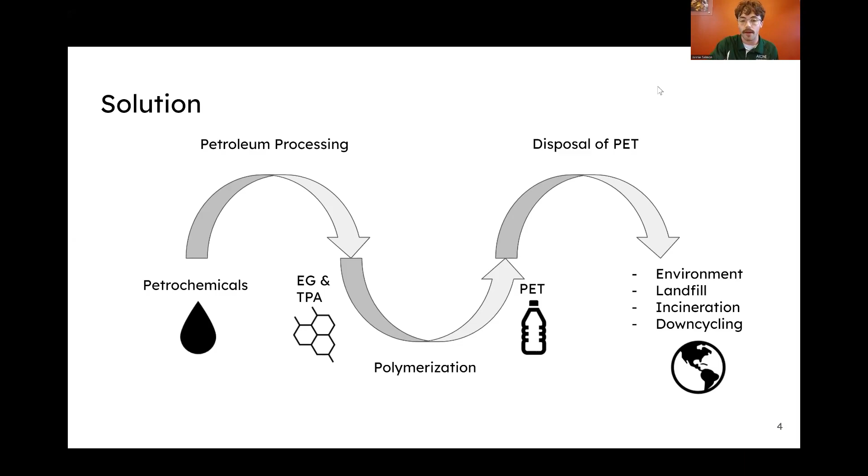When it's then polymerized into PET, where does that plastic go? Well, it goes into the environment, landfill, or it's incinerated or downcycled, all of which still have the plastic there. So what is going to happen to the PET? Well, that's where we come in, where we take a recycling method of closing the loop. This takes out the petroleum processing, so we don't need any more oil for this, and takes away the problem of taking that PET and putting it into the environment, where we're able to close the loop and use the same PET over and over again.

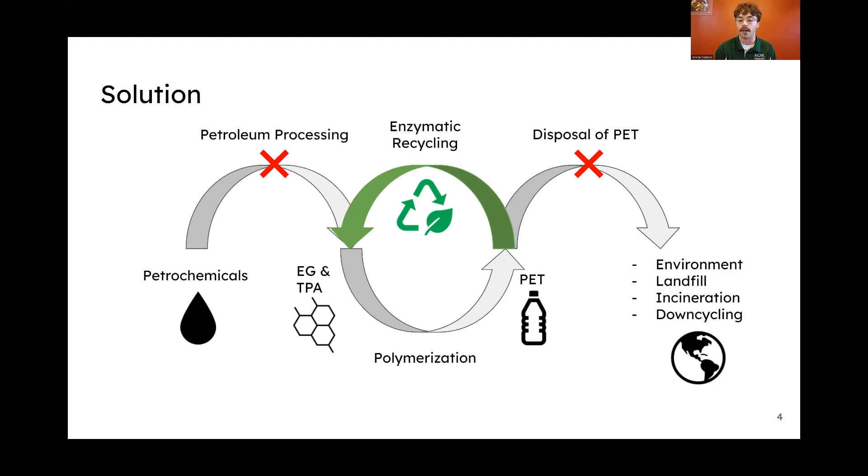Right now, this is also better than other recycling methods due to the fact that it's a cleaner cut on the monomers, where ethylene glycol and terephthalic acid are better in that regard. For the process synthesis and description, the team decided to split up these descriptions into the upstream and the downstream process. For the upstream, we decided to recycle 10 tons of PET plastic per month based on economics for the Larimer County area.

For the upstream process, we have to extrude the PET solid waste at 245 degrees Celsius with a twin screw extruder, and this is to make the plastic amorphous and easier for the enzymes to digest. Then that amorphized and extruded PET will go into a bioreactor containing the ICCG enzyme, which degrades the plastic with sodium hydroxide media. The parameters for this bioreactor will be a pH of 8, 72 degrees Celsius, and 4 milligrams of ICCG enzyme to 1 gram of PET. These parameters were determined by testing on campus and will be explained later.

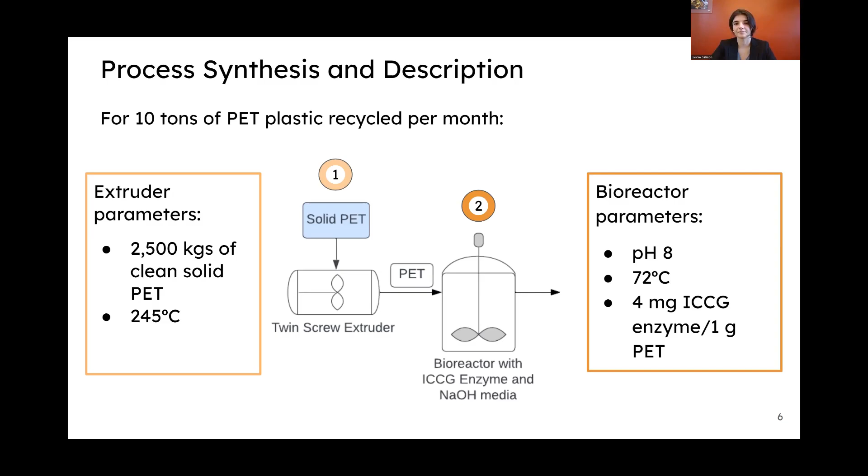So, moving on to the process synthesis for the downstream part of the system, we move on to point 3 here, which is an activated carbon column. This is going to be receiving the product stream from the bioreactor, and it's going to pick up impurities such as solid PET and their oligomers, enzymes from the broth, as well as any other organic impurities such as dyes that could have been in the bottles.

Then that's going to feed into point 4 here, which is a crystallization tank, and it's where the first separation of one of the monomers is going to take place, for TPA. The crystallization tank is going to be receiving sulfuric acid in order to lower its pH and have that terephthalic acid crash out of solution in crystal form and be easily separable from there. And that's where that process stream in the green is going.

And now the product stream is going to feed into the basic mixing tank, which is where we're going to return, in a caustic phase, the pH of the stream back to a neutral pH, around 7 to 8 depending on the process conditions, where we're going to be adding magnesium hydroxide as a base to counteract the previous addition of sulfuric acid. And then after that, we're going to go into a different phase where we have ammonium hydroxide added.

The problem is, when you add the magnesium hydroxide and the hydroxide groups break off and raise the pH again, what you're left with is the magnesium salt. So in order to regenerate that magnesium to repurpose for this process, which is one of the alternative separation methods we've looked into with the recycle stream on the mixer, we're going to add ammonium hydroxide, as seen in part 5 as well, where the hydroxide from the ammonium hydroxide will regenerate the magnesium hydroxide, which we can then put back into the process.

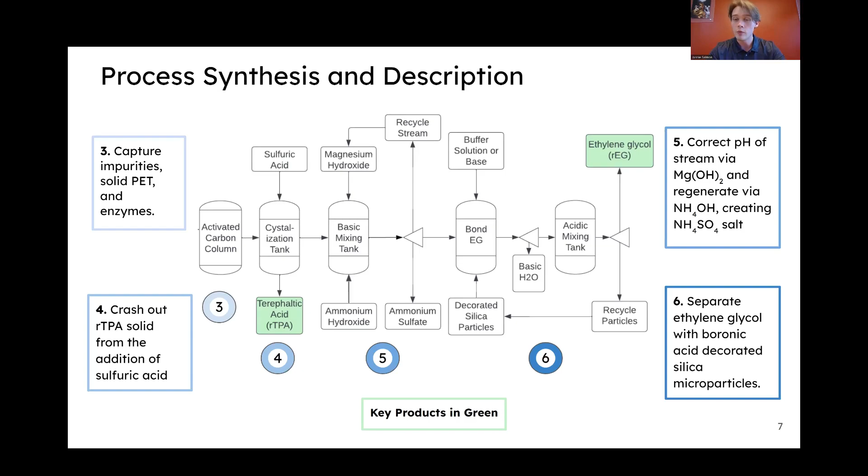Like I said earlier, we are going to describe our testing to develop our process synthesis diagram. For the upstream, we did testing to determine the optimal parameters to produce terephthalic acid, also known as TPA, and ethylene glycol, EG. These are the monomers that will help close the loop to recycle PET bottles. We did this by varying the enzyme concentration and the temperature of degrading the plastic. You can see this in the image here. We have 6 different variations of these parameters, and we ran these for about 24 hours to determine the maximum production of TPA over that experiment.

We determined the TPA production with HPLC, or high performance liquid chromatography, with the ARC lab and the chemistry department. From this testing, we determined that 72 degrees Celsius with 4 milligrams of ICCG enzyme to 1 gram of PET was the most optimal, based on it having the most terephthalic acid produced compared to the other parameters. You can see here in the image where we have little fine lines of PET plastic, and this was the most degraded plastic compared to others where we had more folded plastic.

As for the downstream testing that we did for the process synthesis, we looked at determining the validity of the alternative separation methods that we proposed for both monomers, TPA and ethylene glycol. For the first half with TPA, we attempted a calculation-based pH reduction from 8 to about 3 in order to have the solid TPA crash out of solution and be easily recoverable with filters.

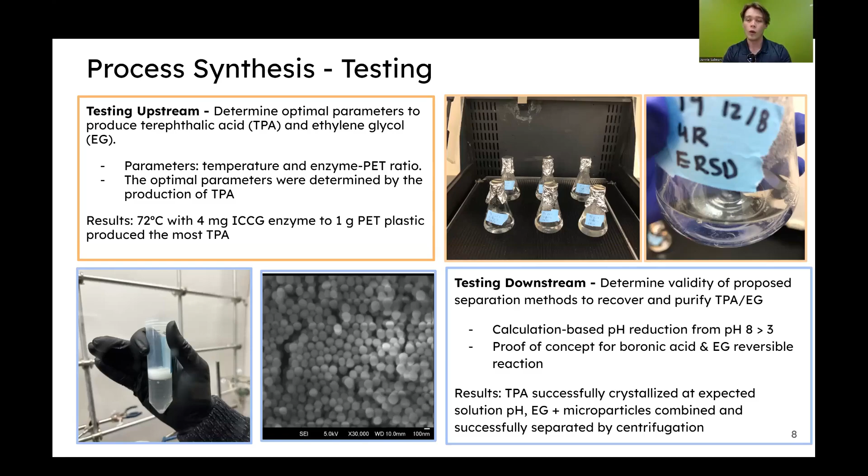Safety of our project. At the scale we were at, there weren't too many concerns. We had a few chemical hazards with our reactions: TPA, ethylene glycol, and boronic acid. These 3 were used in our reaction and our separation process, so just being aware of what those would do if inhaled or orally ingested. We consulted the SDSs and our advisors, and there was also a biological hazard with the enzymes that were used.

The same thing, one of our grad student advisors works extensively with enzymes, so he was able to advise us on how to properly handle these. The biggest safety concern for us was the extruder. Our PET had to be thermally pre-treated before, and this meant heating it up to 245 degrees Celsius, so very hot. And just being aware, we got trained by a grad student who used this machine, and he taught us how to wear the right PPE, clean it, and run it.

So yeah, some of the solutions for our safety were to wear PPE whenever we're in lab, and if this process gets scaled up, use process control sensors for the temperature, and then also to evaluate the integrity of the tanks that we would use at a large scale, because we do use some corrosive chemicals.

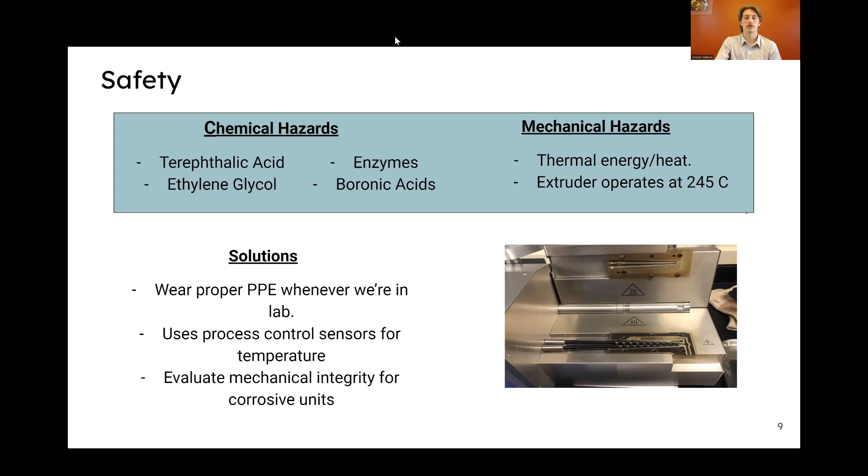As far as sustainability is concerned, both of our process and the current process start with plastic collection. From there, ours differs. We use enzymes to degrade the plastic polymer into its two monomers, ethylene glycol and terephthalic acid. After this, we use a precipitation reaction to crash out our TPA, and then use boronic acid decorated microparticles to separate out our ethylene glycol.

After that, the two monomers, ethylene glycol and terephthalic acid, are repolymerized into bottles, closing the loop on the circular economy. This is where it differs from the current process, which would put those bottles into recycling centers or landfills. So the pros of our process are that it actually recycles the PET instead of downcycling the plastic like is done in current recycling plants.

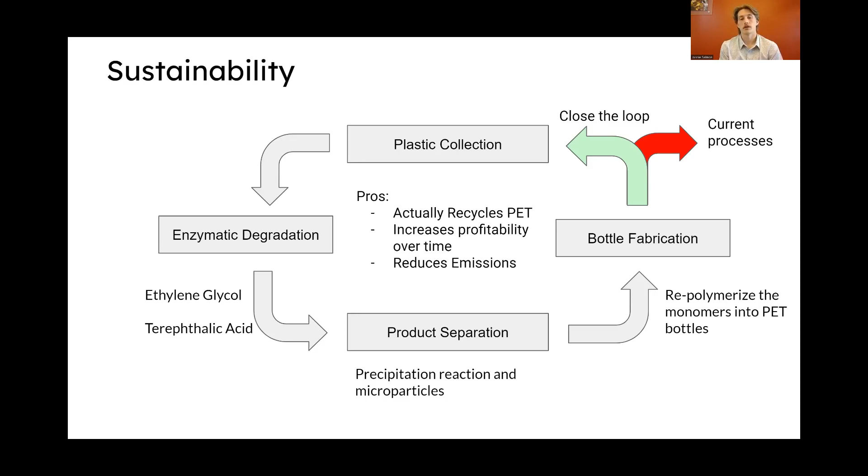If we close the loop on the plastic bottle, it'll increase the profit of the bottle over time. And then since we were able to find some novel separation techniques, it will reduce the emissions caused from the current distillation separation that the current art is using to acquire the ethylene glycol.

Our customer outreach was to 4 major different groups of people, including citizens, different recycling centers, EcoCycle, and county representatives. When we did this, we first looked at citizens and their recycling habits in Larimer County, and especially in Fort Collins. And what we learned from this is how much people are willing to spend on recycling, and as well how people recycle in general.

From this, we were able to talk to people such as County Commissioner Kristen Stevens. She gave me a lot of information, a lot of contacts to talk to, and she also told me about the plans of recycling here in Larimer County. She was very useful and really pointed us in the right direction. From here, we were able to also learn more about the plans of Larimer County going forward, and to know a little bit more about the new landfill here in Larimer County.

After that, we were appointed to talk to the solid waste management here in Larimer County, and talking to them, we got a lot of information and a lot of new people to talk to from there. We were also able to validate some of our numbers and understand how recycling works in Colorado, where a lot of plastic isn't recycled per se, but cardboard and glass are major recyclables here.

From here, we were able to talk to people at EcoCycle. That's another group based in Boulder that we were recommended to talk to. These gave us a deeper understanding of how recycling works and how policies are being made. Bills passed, such as the circular economy bill, was one of the things EcoCycle put on and did a great job of getting passed. We were also able to understand what Recycle Colorado is, which is a large group of companies here that are all a part of learning how to recycle better in Colorado and learning about how to deal with the new laws.

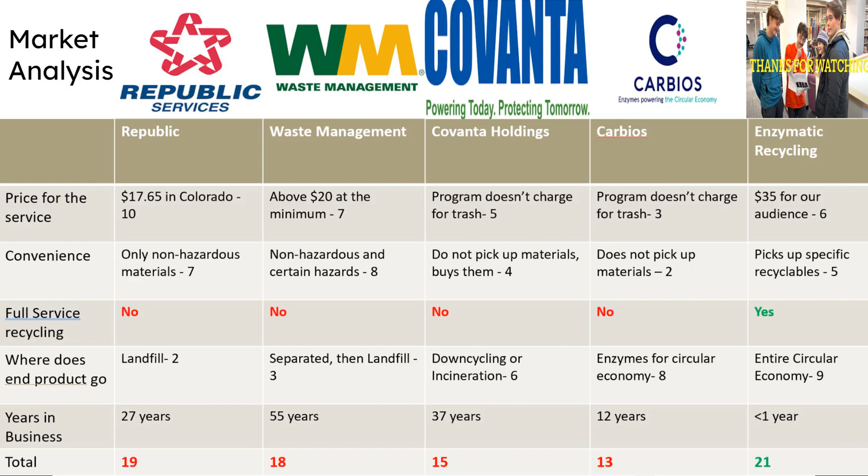For our project, however, we're doing something a little bit different where we're charging a subscription fee to pick up trash and then recycle this. This is the entire circular economy, which is a lot better than just specializing in one of the areas. As well, another important part to look at is the number of years in service, where we're a very new company, but we're looking to make a big splash, especially in Colorado with all these new bills being passed. It is very plausible for us to be able to do this.

When working through the techno-economics of this project, we started with the raw materials, which come in at around $32,000. For employees, we are going to have 1 trash collector, 3 operators, and 3 engineers. Their monthly salaries combined will be around $39,000. And then our products, which are TPA and EG, will come in just under $400,000. So subtracting our raw material and employee costs, we'll have a profit of around $300,000.

The infrastructure to build this plant, including the land, the bioreactors, the extruder, things of that nature, will come in just above $1 million. And this is all on a per month basis. We based our raw materials off bulk prices. So that would be train cars of chemicals, things of that nature, and they do not include shipping at this point, just because it fluctuates so much.

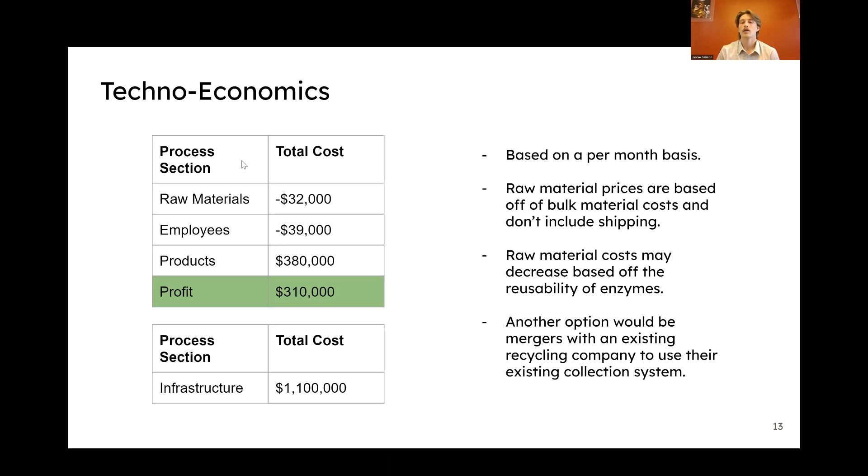Our raw material cost may be able to be decreased in the future. We are accounting for having to buy or make our enzymes new every month. But since they have a HIS tag, they are able to be extracted using a nickel column, but we did not have time in the scope of our project to test their durability or robustness. And there's also an option to reduce our infrastructure cost if we were to merge with an existing recycle or composting company. This would allow us to use their existing trucks and logistics systems, which would be a great help.

For a further dive into our techno-economics, like I said, our infrastructure cost will also be our initial investment. So we would be looking for around $1 million to help start our plant. Our return on investment is incredibly high. I will get into that in just a second. Our payback period would be about 1/3 of a year, and then our yearly profit would be closing in on $4 million at 3.7. The reason we think our ROI is so high is mostly due to our low raw material cost and our high product sale cost. Like I said previously, our raw materials are sourced at bulk pricing, so they're very, very small, on the order of cents per kilogram of materials.

But since we are using a greener recycling method, we thought it was fair to increase the cost of our products. So what we did was look at one of the current chemicals that has green and brown types, which is hydrogen, and we took a ratio of the two. That came in at green hydrogen being about 7 times more expensive than brown hydrogen. And since our TPA and ethylene glycol are green, we multiplied their bulk price by 7 to get our sale price. And so this is why our return on investment is so high.

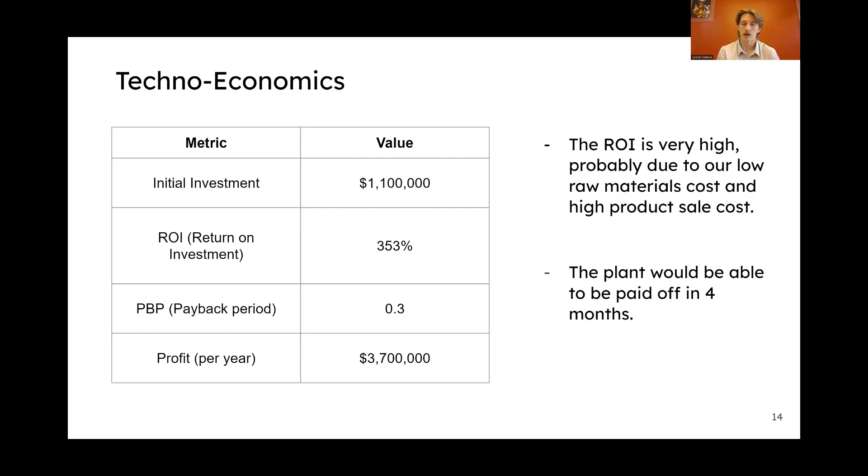For future works and thank yous, we first have to investigate the feasibility of recycling enzymes with a nickel resin column. And this is because, as Eric said, it could possibly reduce our costs and our waste of the enzymes by capturing them with a HIS tag and then reusing them in 1 or 2 more processes of degrading the plastic. Another option is to investigate possible alternative enzymes, because protein engineering is ever growing to make these plastic degrading enzymes more stable and work at higher temperatures.

And then to compare purified enzymes to supernated enzymes. And this is because purifying enzymes is a very expensive process, where if you use supernated enzymes, there is more E. coli or cells that would be lysed out of, but if it's equally efficient, this could reduce our cost. The full experimental run to go through all the processes will be a final step to make sure our process is feasible and economical at a large scale.

Our thank yous go to Dr. Margarita Herrera Alonso. She's been our advisor throughout this whole year. Bert Vermeulen for supporting us through the venture project and supporting us with funding. Andy Trimmer, who is our mentor through the venture project and has been very helpful in the market analysis. Jacob DeRue, who's a PhD candidate. He's been a graduate mentor to help us throughout the process.

Jamie Cusciero is a post-grad student that helped us with the HPLC testing. Carla Curena Hernandez, she helped us in the Herrera lab. And then members of the National Renewable Energy Laboratory donated the enzymes, and then the histones lab who purified our enzymes, and then the chemistry department in the ARC lab to use instruments to analyze our data.